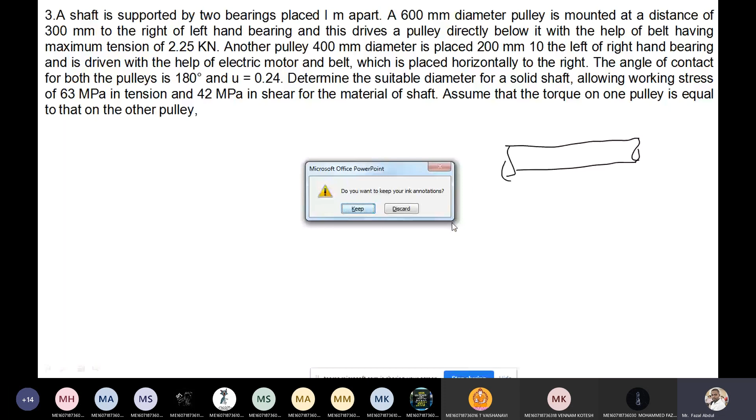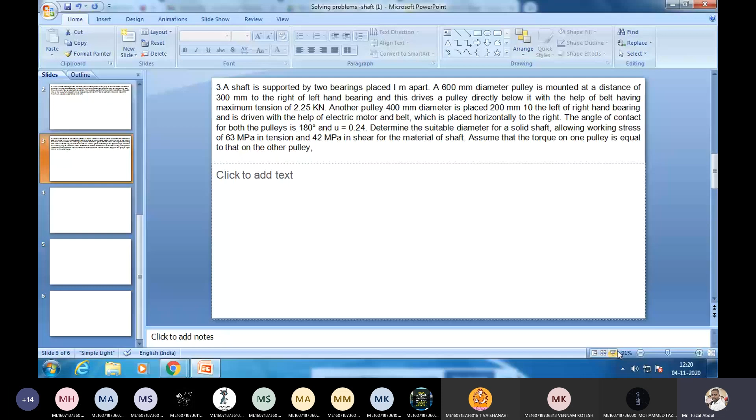One shaft is there, supported in two bearings. So I am drawing the bearing here. Bearing. This is the one bearing. Supported by two bearings placed 1 meter apart. So total length is 1 meter.

And a 600 mm diameter pulley is mounted at a distance of 300 mm. One pulley is there, how much is the diameter of the pulley? 600 mm diameter. That is placed at a distance of 300 mm to the right of the left hand bearing. So this is the left hand bearing. To this left hand bearing, it is placed on the right side. It means it is here, and the pulley is mounted here.

At what distance? 300 mm is given. I am writing here in terms of meters, 0.3 meters. Now what is the diameter of the pulley? How much is given? 600 mm. So I am writing here as meters, 0.6 meters.

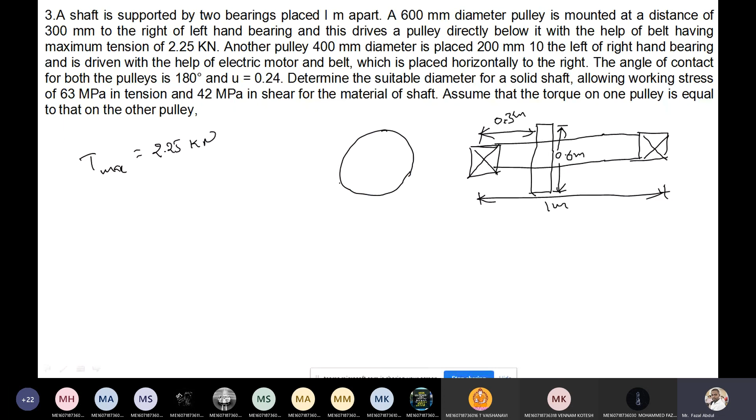So for this I'm drawing the front view here. Diameter is 0.6 meters, and it is working with the belt drive vertically below it. The tension tight side is T1, slack side is T2.

Now below it, with the help of belt drive having the maximum tension, another pulley of 400 mm diameter is placed at a distance of 200 mm to the left of the right hand bearing. This is the left hand bearing. This is the diameter, 400 mm. I'm writing in terms of meters, 0.4 meters.

So I'm drawing another front view for the small pulley here. Left hand bearing, the distance from the right hand bearing to this one is 200 mm, given. I'm writing it in terms of meters, 0.2 meters.

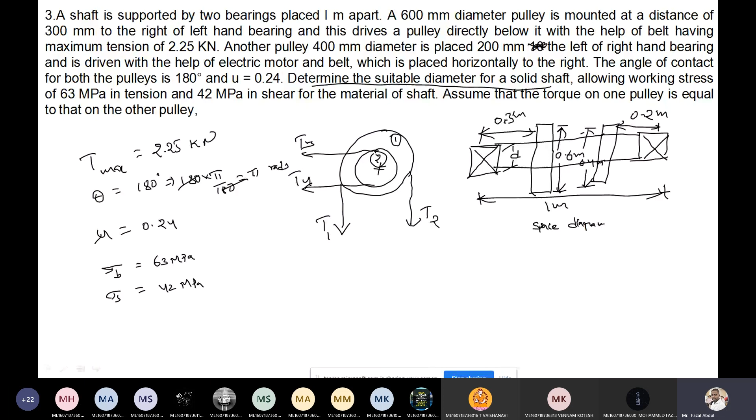This diagram is very important for the design of shaft. Whatever data is given, you need to convert into diagrammatic form, for the diagram also you have marks. This diagram, specifically for the design of shaft, is known as the first step, the space diagram.

Now we need to calculate the diameter of the shaft. Before finding the diameter, we need to identify which category the given problem belongs to. We have a total of 6 categories: first is the shaft subjected to pure torsion, second is pure bending, third is combination of bending and torsion, fourth is combination plus an axial load acting in addition, fifth is based on rigidity, and sixth is based on lateral rigidity and torsional rigidity. So among these 6 categories, we need to identify which one the given question belongs to.

So from the space diagram we can conclude one thing. Because the total system is running with the help of an electric motor, power is transmitting, which means the shaft is subjected to torque.

Because of the mountings, one larger pulley and one smaller pulley are mounted on the shaft. Due to these two mountings, the shaft is also going to be subjected to bending.

So in this diagram, you are facing two parameters: one is T, the other is M. It means this problem comes under the third category, combination of torsion and bending. That's how you need to conclude.

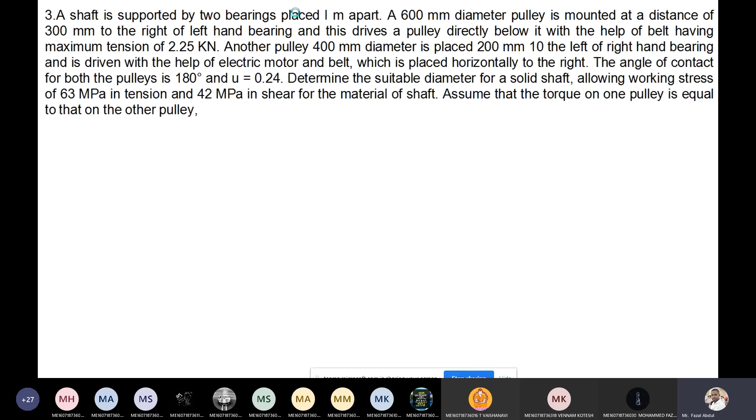But check the problem: power value is not given. The system is given in terms of belt drives. See the space diagram front view, the first pulley is subjected to the vertically down belt.

The second pulley is subjected to the horizontal belt system. It means we can calculate the torque with the help of the ratio of belt tensions.

So first, when we have the two tensions in the belt, torque T equals T1 minus T2 into radius of the pulley. So here two pulleys are there.

First I'm giving the names: for the first bearing, this is A and this is B, this is the C pulley and this is the D pulley.

So first I am taking the C pulley. Here two pulleys are there, having different diameters. If the pulleys had the same diameter and same location, the first C pulley would be located at 0.3 meters, and the second pulley is located at 0.2 meters. It means it is a non-symmetrical section.

If it were a symmetrical section, what would I do? I would consider it as a cantilever beam, and torque is T1 minus T2, and bending moment is W into L. That's how I would solve it.

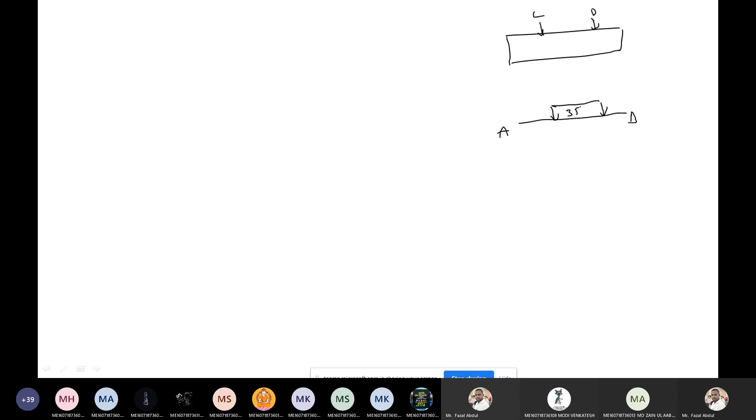357.3 Newton meter. Okay, this is a torque diagram.

Now the second one is a load diagram we need to calculate. So the load diagram we need to draw, for A and B, and for the C pulley and D pulley. So first the C pulley.

C pulley is having the vertical belt drive system, see the first diagram. D pulley is having the horizontal belt drive system. So because of that, the C pulley is having the vertical load, D pulley is having the horizontal load.

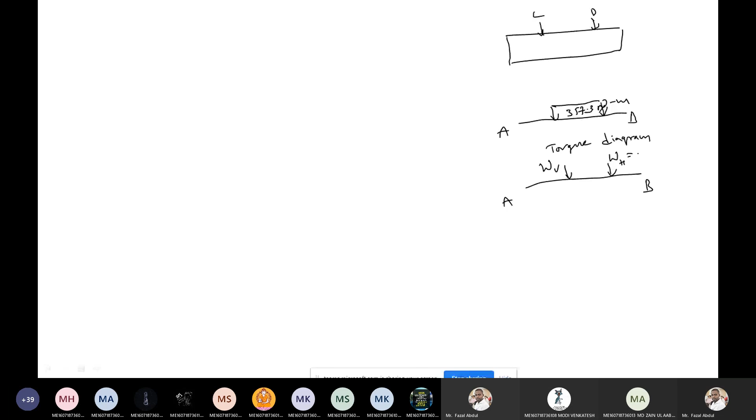So horizontal load on the C pulley, how much? That is 0. And vertical load for C pulley, how much is that? The vertical load for C pulley is T1 plus T2. T1, how much we got?

The question gives T1 as 2250, and T2 how much we got? 1058. So total value is 3308.

3308 newtons. Now what load on the D pulley, that is horizontal load. Horizontal load for the C pulley is 0, because the C pulley is not having any belt drive system in a horizontal manner.

3308 newtons, D pulley separately, so D pulley A and B. D pulley is having the horizontal load, somewhat magnitude, not 0. These two are for the C pulley. Now vertical load for the D pulley is 0, because it is subjected to the horizontal belt drive system.

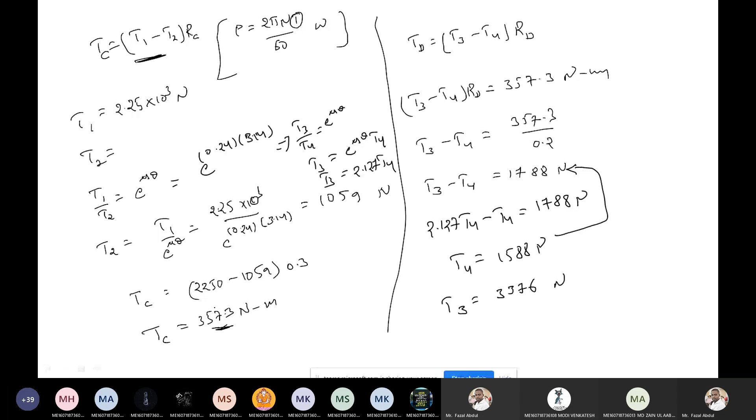Now we calculated the load diagram. What is the purpose of the load? In the previous case we calculated the torque value. Torque we got as 357.3. We are going to use that T value in this equation here.

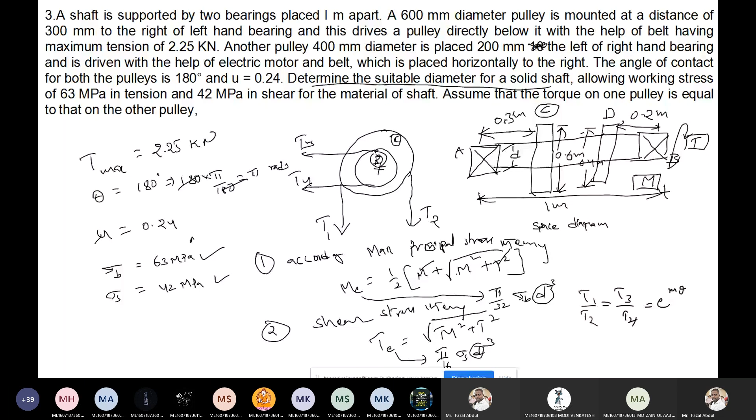But we need bending moment here. To calculate bending moment, first we draw the vertical line AB. Now reaction at A, RA, and reaction at B, RB.

First considering the C pulley. Now vertical reactions due to the C pulley. Because the C pulley is having the vertical belt drive system, the load acts vertically downwards. Because of that, vertical reaction at A and vertical reaction at B are going to be generated.

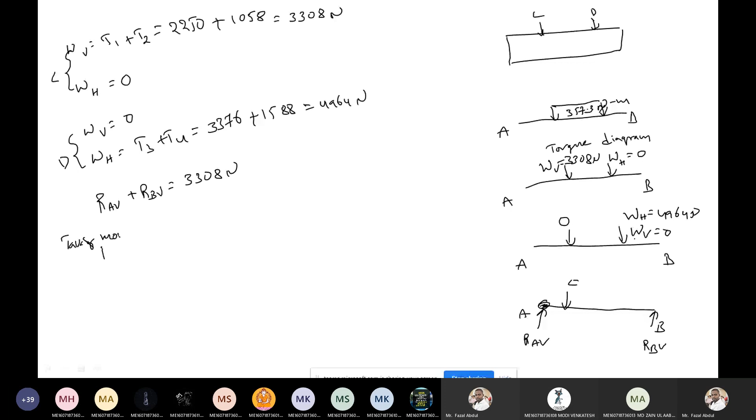So what is RA? First taking the moment about point A. Taking the moment about A point, that is RBV into 1, since the total length is 1 meter.

This is minus because it is rotating in an anticlockwise direction. Since I'm taking the moment about A point, it means this is rotating anticlockwise, so I take the minus sign here. Plus vertical load into the distance from C point, which is 0.3 meters.

So vertical load is 3308 into 0.3 equal to RBV. Now what is RBV? RBV is 992.4 newtons... now what is RAV from this relation?

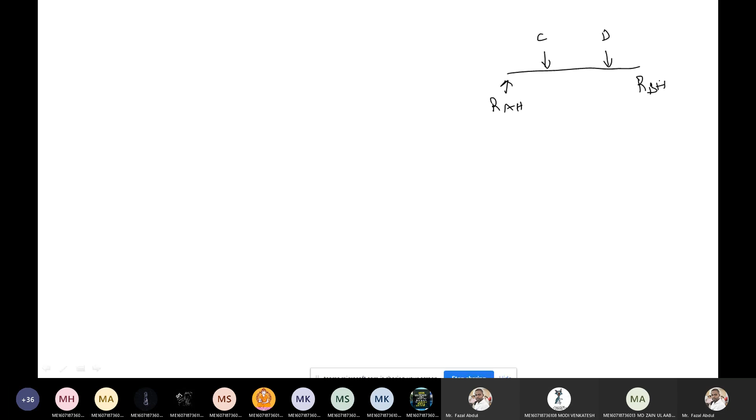So what? How much total reaction, horizontal at A plus horizontal at B? Total is equal to horizontal load. Horizontal load, how much we got? Horizontal load is 4964 newtons. Okay, now first calculating separately RA and RB.

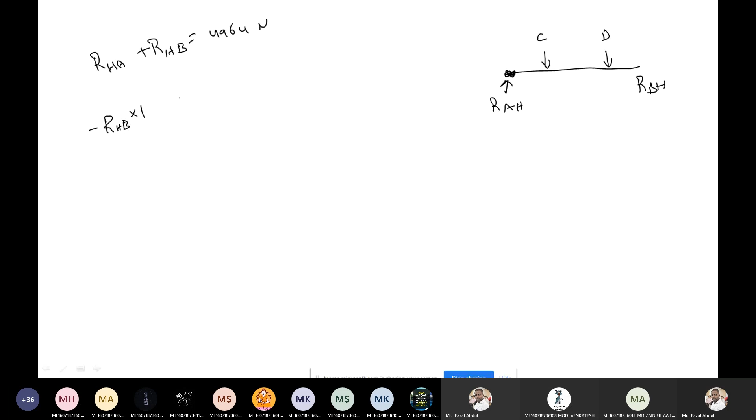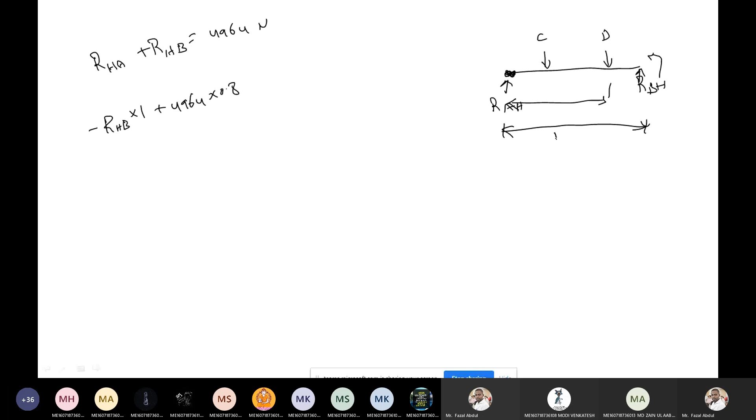So taking moment about RA. So what is it? Horizontal at B into 1, and this is minus because the reaction is acting in counterclockwise direction, plus load at the D point. Load at D point is 4964 into 0.8, from here to here distance. This is the total 1 meter. From here to here it is 0.2 meter. So 1 minus 0.2 is 0.8 meters.

Now what is RHB, horizontal load? So horizontal reaction at B is 3971 newtons. Now what is at A point? Horizontal reaction at A point is 4964 minus 3971, so what is it? 993 newtons.

Okay, now I'm calculating the bending moment at C point and at D point. The bending moment at C point is horizontal at A into 0.3, horizontal at B into 0.2. So horizontal reaction at A point is 993 into 0.3. Horizontal reaction at B point is 3971 into 0.2. So if you substitute, what is the answer? At C point, 297.9 Newton meter.

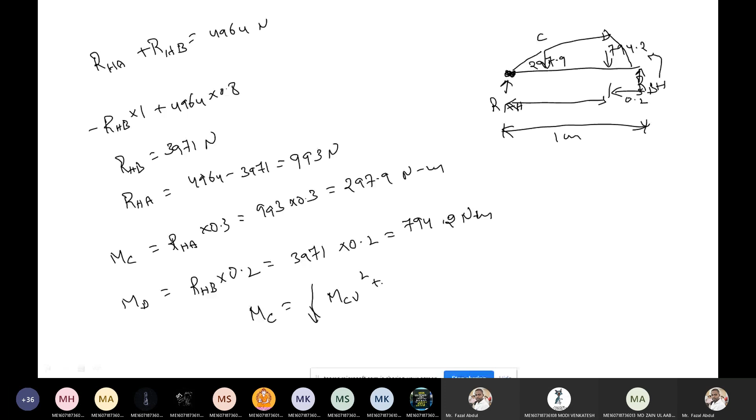To calculate resultant bending moment for the horizontal, here I am writing resultant bending moment at C point is square root of bending moment at C vertically square plus bending moment at C horizontally square. How much is this one? This one is square root of 694.7 square plus horizontal bending moment at C point is 297.9 square. Calculate it, how much is it?

756 Newton meter. Now in the same manner, resultant bending moment at D point: resultant at C, resultant at D, so here bending moment at D vertically square plus bending moment at D horizontal square. So D vertically how much? 198.5 square plus horizontal D is 794.2 square. Solve it: 819.2 Newton meter. The two bending moment values we got.

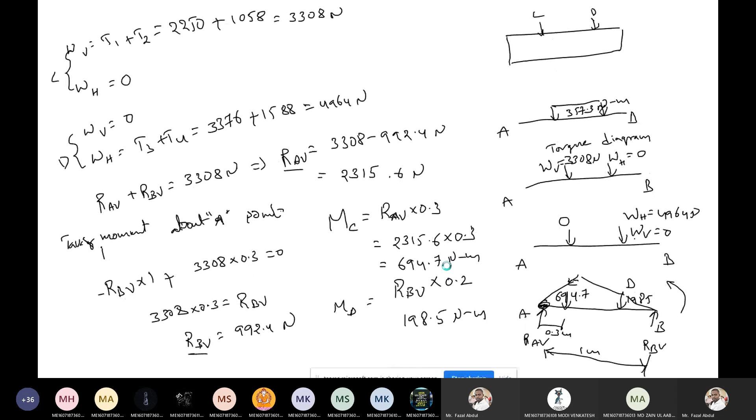Now two bending moments we got, but in the question, in the starting equation, only one M value is there, not horizontal, not vertical. So whenever we are getting the two bending moments, horizontal and vertical, at D and C - at C the resultant bending moment we get is 756, at D the resultant bending moment we get is 819. So between these two, the larger value we need to select for the design.

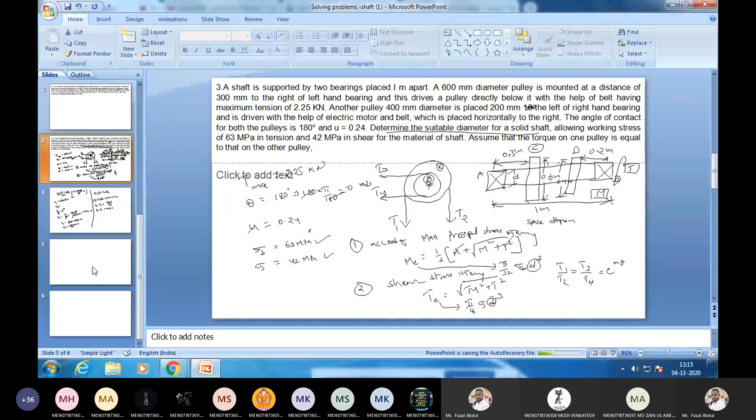The larger value we need to select. So how much larger? 819 we got. So bending moment larger value is how much we got? 819.2 Newton meter. Okay, M value and T value both we calculated.

Now first, according to the principal stress theory, equivalent bending moment equals 1/2 into M plus square root of M square plus T square.

Now ME, equivalent bending moment, is pi/32 into sigma B into d cube equals 1/2 into M. How much we got? 819.2 plus square root of 819.2 square plus torsion value, how much we got at the beginning? 357.6 at the beginning, 357.6 square.